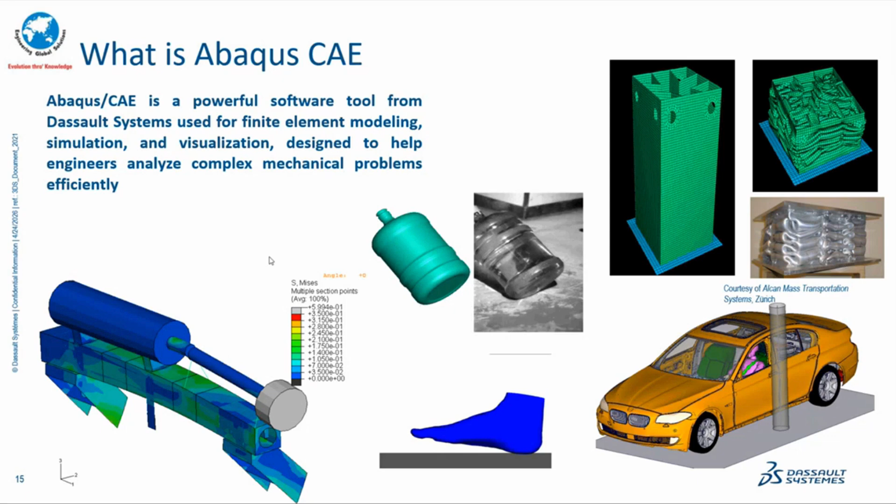Abaqus CAE allows users to create basic geometries directly within the software using sketching tools such as lines, arcs, and rectangles. These sketches can be converted into 2D or 3D parts using operations like extrusion, revolution, and sweep.

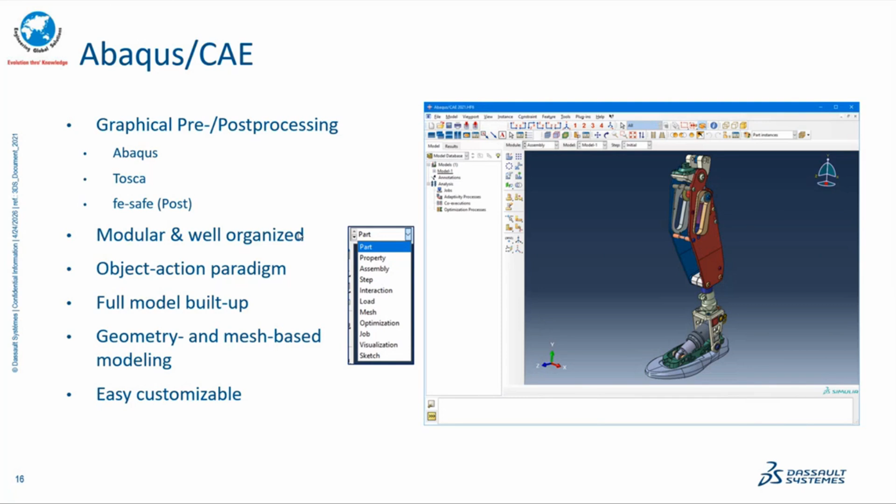Imported geometry can also be used with Abaqus CAE. Other CAD files can be directly imported into Abaqus CAE for analysis. Complex models created in CAD tools can be imported. Abaqus supports common file formats such as STEP, IGS, ACIS, and Parasolid. Output formats from other CAE software like Hypermesh can also be imported into Abaqus, and we can directly proceed to post-processing.

In Abaqus CAE, materials are defined by specifying mechanical, thermal, or other physical properties required for the simulation. Common properties include Young's modulus, Poisson ratio, density, and plastic behavior. Abaqus supports a wide range of material models such as elastic, plastic, hyperelastic, viscoelastic, and damage models. This allows engineers to simulate realistic material behavior under different loading conditions.

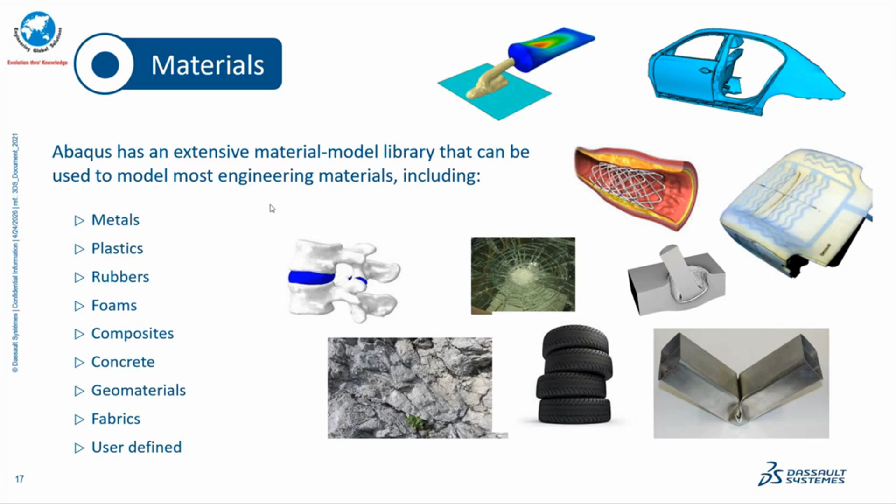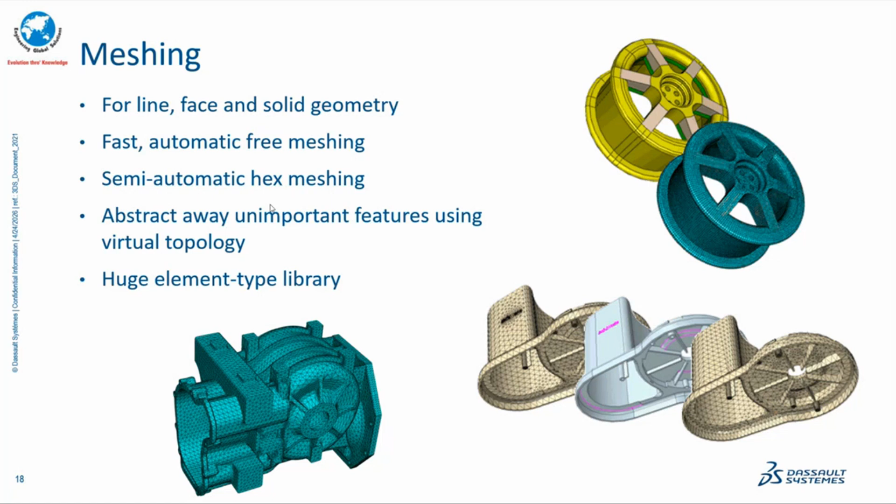Meshing is the process of dividing the geometry into small finite elements connected by nodes. These elements help the software numerically solve complex engineering problems. Abaqus CAE provides different element types and mesh controls such as tetrahedral, hexahedral, and structured or free meshes. The element type is selected depending on geometry complexity and analysis requirements.

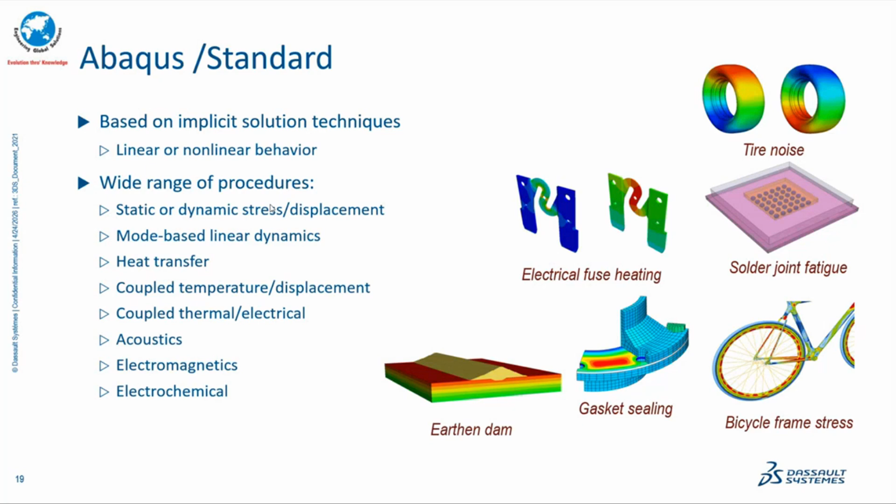We have two different portfolios in Abaqus CAE: Abaqus Standard and Abaqus Explicit. In Abaqus Standard, advanced simulation capabilities include structural analysis, thermal analysis, dynamic analysis, contact simulations, and damage and fracture modeling. Abaqus Explicit is well known for handling complex nonlinear problems such as material nonlinearity, large deformations, contact interactions, and damage and fracture behavior. That's why it's widely used in advanced research and high-end engineering analysis.

Abaqus CAE has wide industry applications. Automotive for crash simulations and durability. Aerospace for structures and fatigue analysis. Energy and pressure vessels for stress and thermal analysis. Manufacturing for forming and machining simulations.

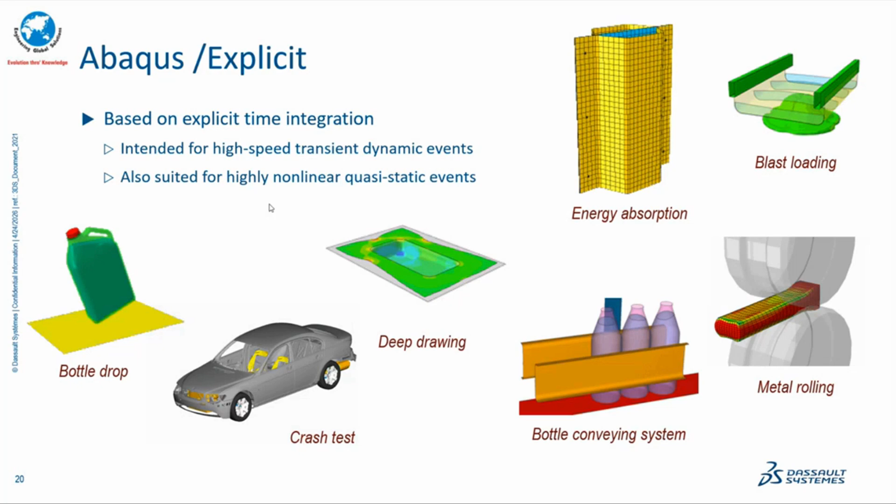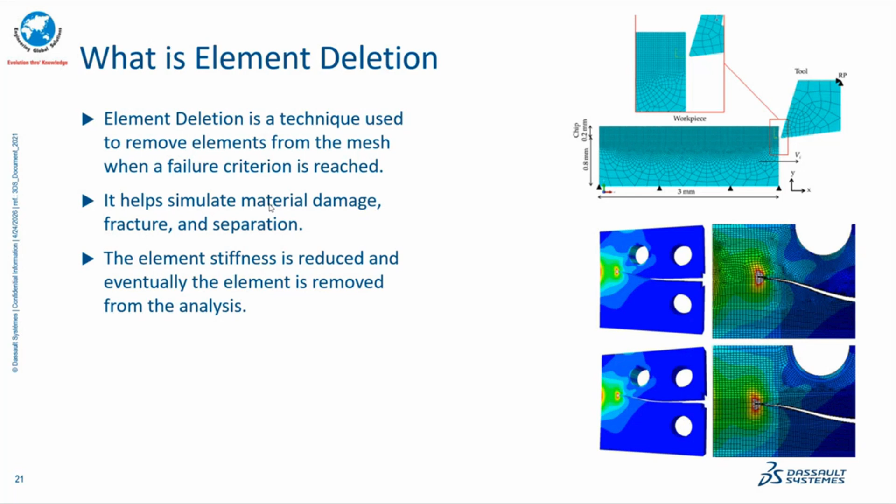Now we will dive into the topic of element deletion. Element deletion means removing the element from the mesh during simulations when a failure criterion is met. The element stiffness is reduced to zero once deleted. It no longer carries the load and is removed from the stiffness matrix contribution. It simulates crack growth or material failure.

This helps simulate crack initiation and crack propagation in structures. As stress increases near the crack tip, the element fails and is removed, allowing the crack to grow naturally in the simulation. This is widely used in fracture mechanics studies.

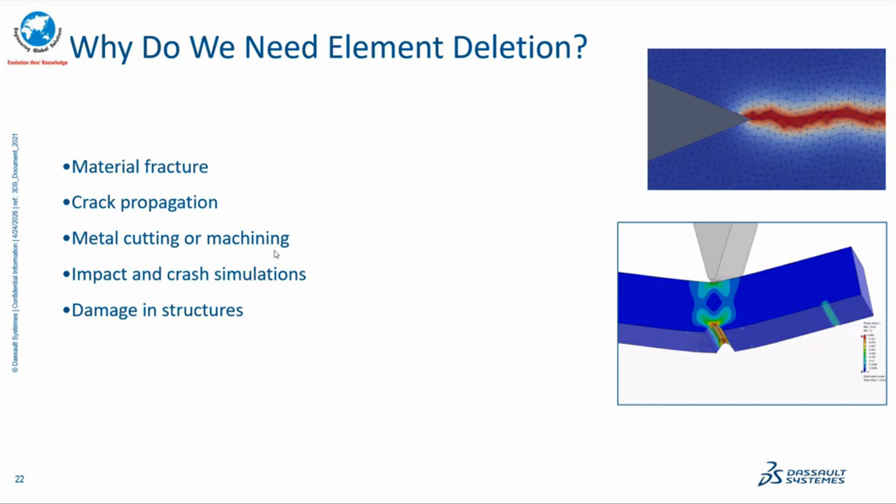The simulations show damage localization near high stress regions. The crack grows as damage evolves in the material. Abaqus damage models help predict fracture path and structural failure.

Ductile damage models are used for metals, large plastic strain, and impact problems. Shear damage model is used for sheet metal forming and cutting simulations. Damage evolution energy is used for displacement-based softening behavior.

The Johnson-Cook damage model is very popular in high strain rate plastic impact crash simulations. The Johnson-Cook model is a constitutive material model. It's widely used to simulate the behavior of metal under high strain rates, large plastic deformations, and high temperatures.

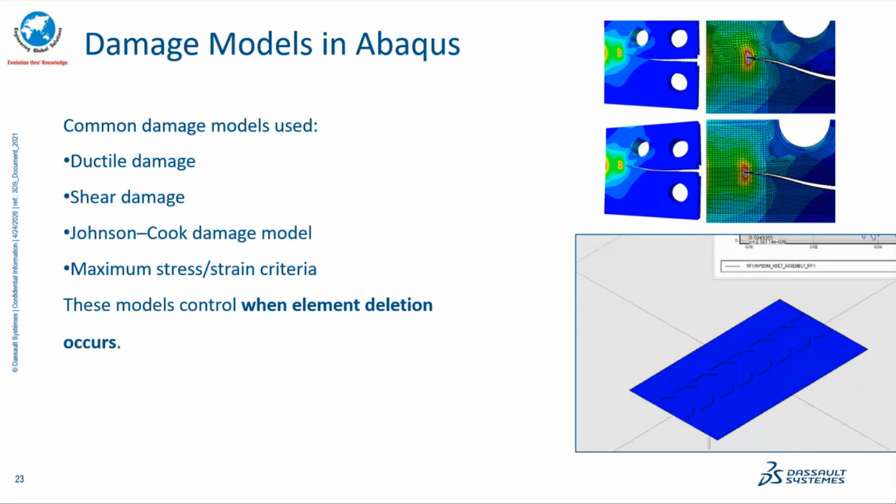In this paper, we will fully explain this model, which is implemented in the Abaqus Explicit solver. Based on our experience in finite element simulations, this model is particularly effective for impact analysis, ballistics, and machining simulations. We use the Johnson-Cook damage model for this demonstration.

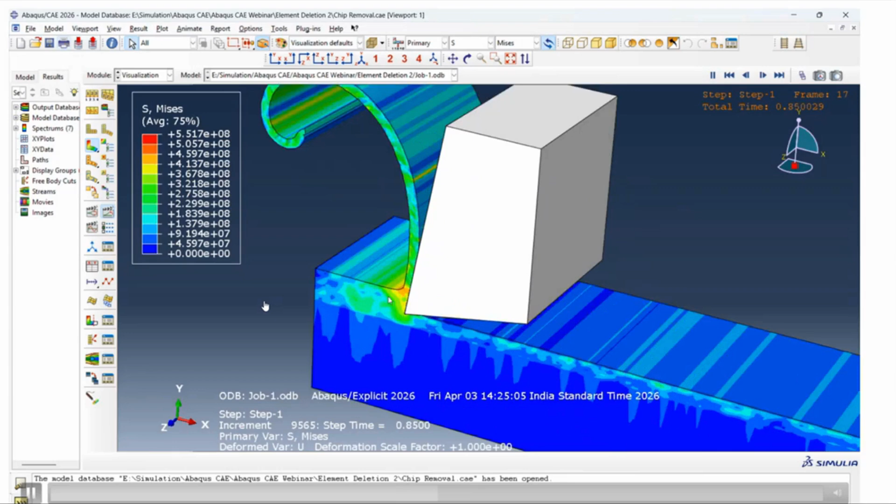I will demonstrate the concept of element deletion in Abaqus CAE using orthogonal cutting, a simplified machining model where the cutting edge is perpendicular to the cutting direction. It's widely used in research to study chip formation, tool wear, and cutting force.

Why this simulation matters: physical experiments are costly and time consuming. Abaqus allows virtual testing of multiple cutting speeds, tools, geometries, and materials. This helps guide the industry in tool design and process optimization.

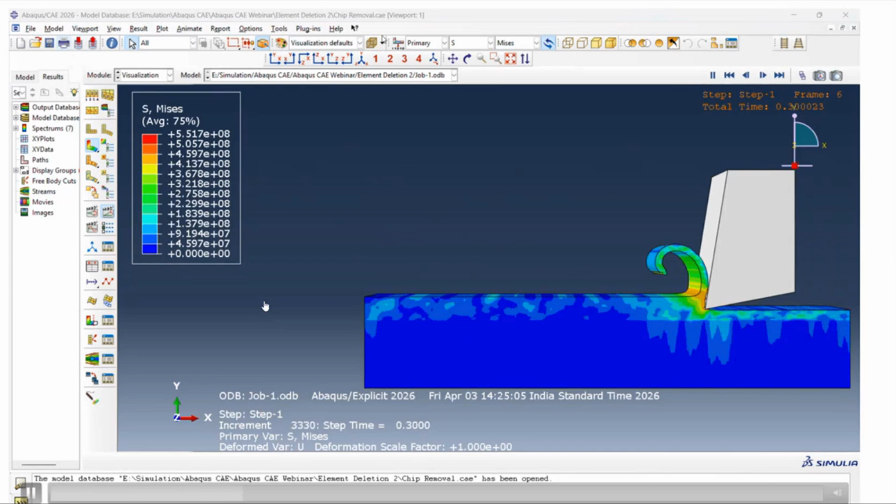In Abaqus itself, we can create the tool and workpiece, building 3D models from 2D to 3D creations with defined dimensions. The tool is modeled as a rigid wedge with a defined rake angle. Cutting edge sharpness is critical to the fine definition in geometry.

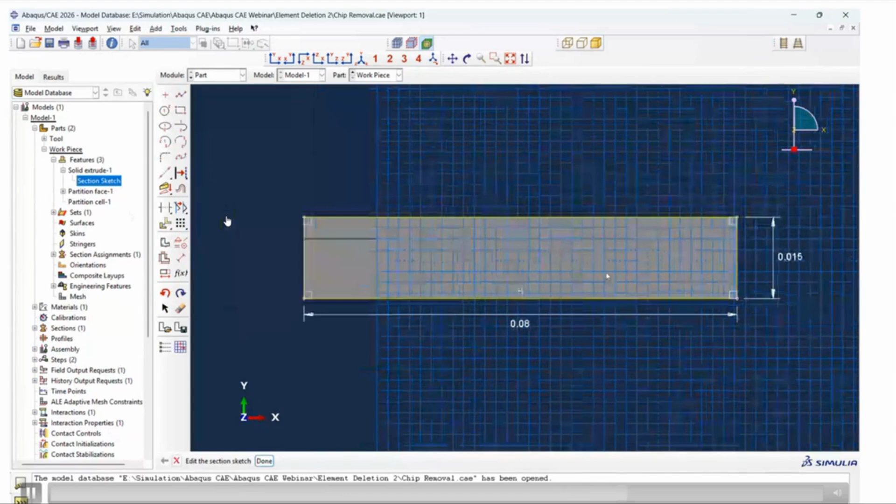We can create the workpiece as a rectangular box, with dimensions chosen to represent a small section of the material, sufficient to avoid boundary effects. This is how we can create the tool and workpiece in the Abaqus interface.

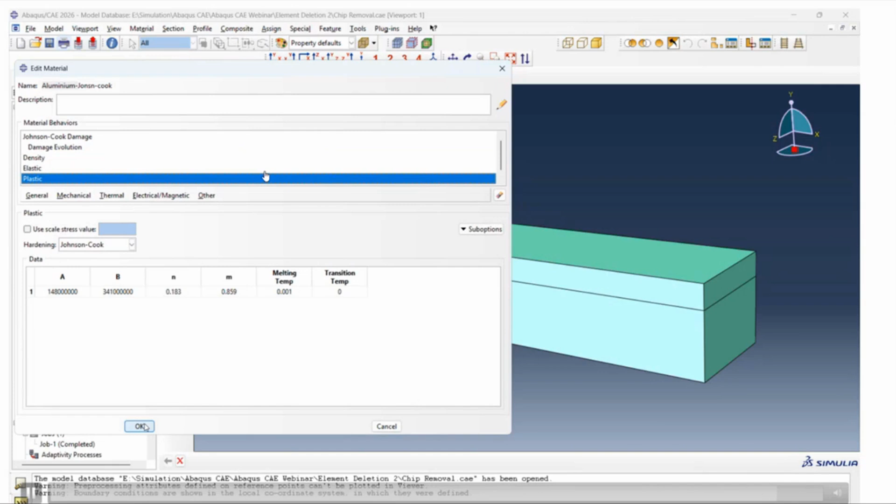Next, we will assign the materials, applying the material property to the workpiece. The workpiece material model uses the Johnson-Cook model as mentioned previously. It's a plasticity model that accounts for strain hardening, strain rate sensitivity, and thermal softening. Input parameters include yield strength, hardening modulus, strain rate constants, and thermal coefficients. We also assign the density to the model.

The tool material will be rigid, but can be elastic with very high stiffness in a thermal effects study.

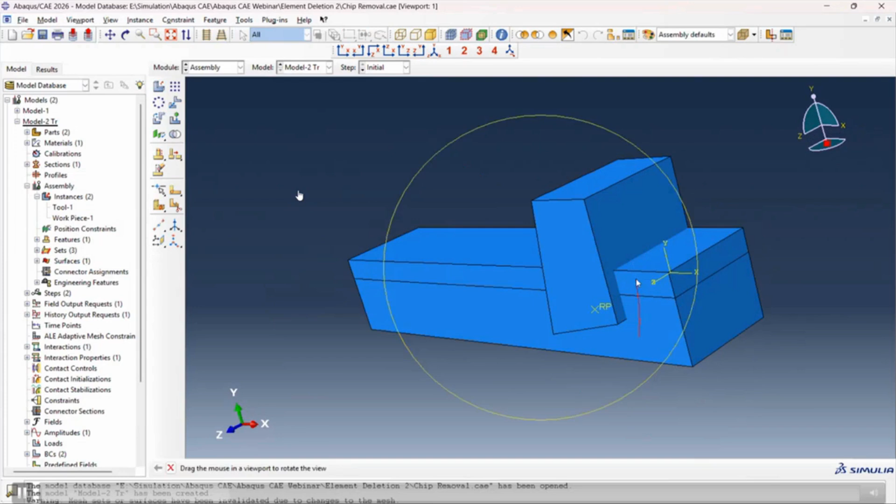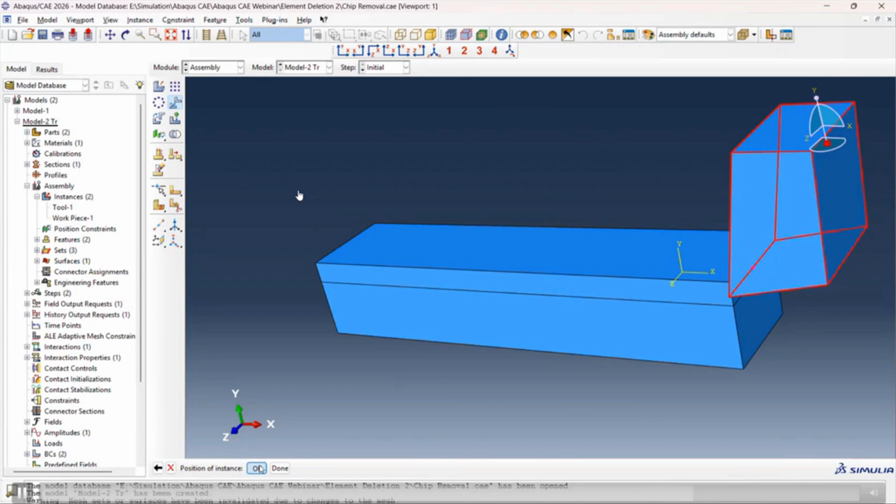Next step, we will assemble the workpiece and the tool in the correct cutting position. The workpiece and tool were imported and created as separate parts, then assembled in Abaqus CAE to replicate the actual machining or forming configuration. This assembly ensures correct positioning and alignment before applying loads and boundary conditions. With the help of the mates in Abaqus CAE, I position the tool and workpiece in the correct format.

We are defining the dynamic explicit step to capture the high speed tool workpiece interactions. In this method, we will define what type of analysis we are going to run. Explicit dynamics is chosen because it handles the complex contact and large deformation effectively.

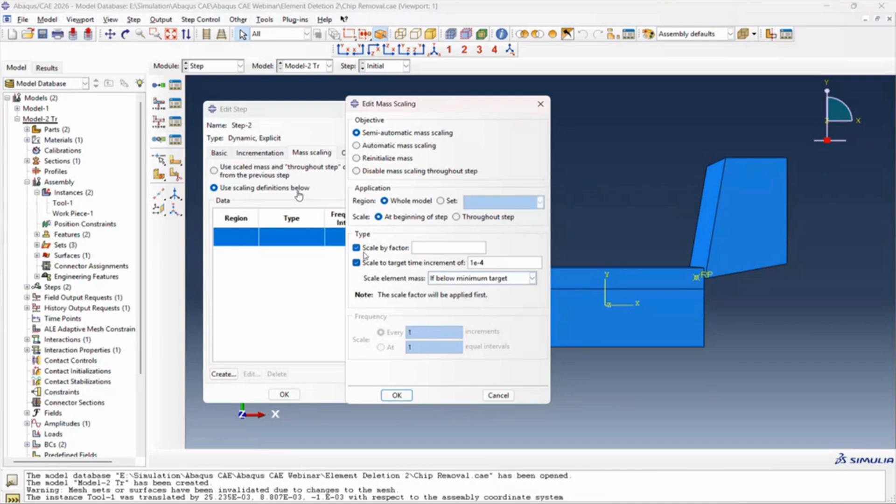Mass scaling is applied to improve the computational efficiency without compromising accuracy. A mass scaling setup is a definition to create the target time increment of 1 × 10⁻⁴. This ensures the stable time increment while reducing the total number of increments.

Next, we will create the output request. The field outputs are configured at 20 intervals through the step. This provides a clear record of stress, strain, displacement, and contact variables over time. The interval settings ensure manageable data size while capturing the evolution of results.

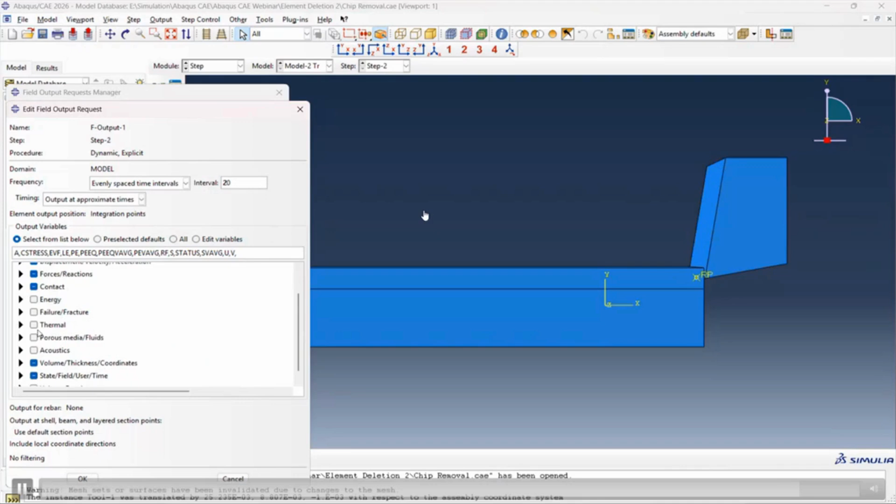The importance of the mesh. Next step will be the mesh module. In cutting simulations, the mesh is more and more important. Creating a best quality mesh directly impacts the accuracy of stress, strain, and temperature predictions in orthogonal cutting.

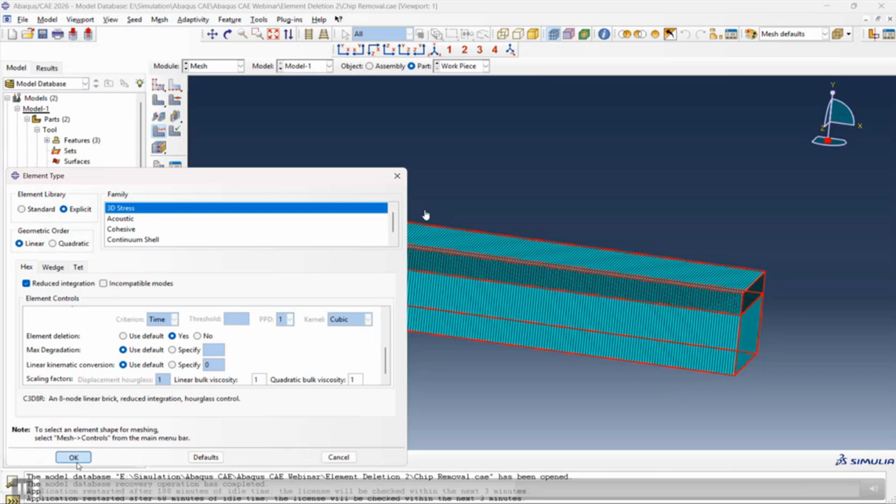Cutting involves a high gradient near the tool workpiece interface. In Abaqus, enabling element deletion allows elements to be removed once they reach the critical damage criteria. This is essential in cutting simulations to realistically represent the chip separation and material removal.

For the tool, focus on the cutting edge and the immediate contact zone of the workpiece. Use partitioning of the workpiece geometry to control the mesh distribution.

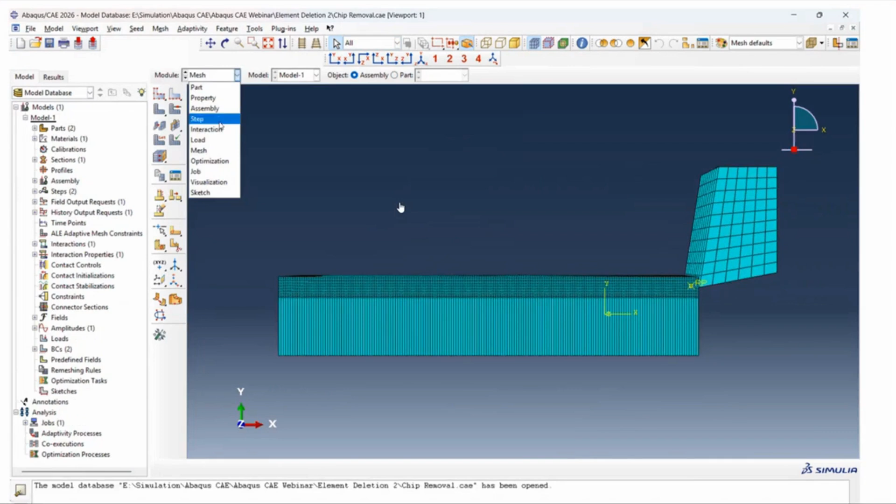Now we are creating the interactions between the workpiece and the tool. The accurate interaction setup ensures realistic cutting forces. Define a contact pair carefully between the tool and workpiece surfaces.

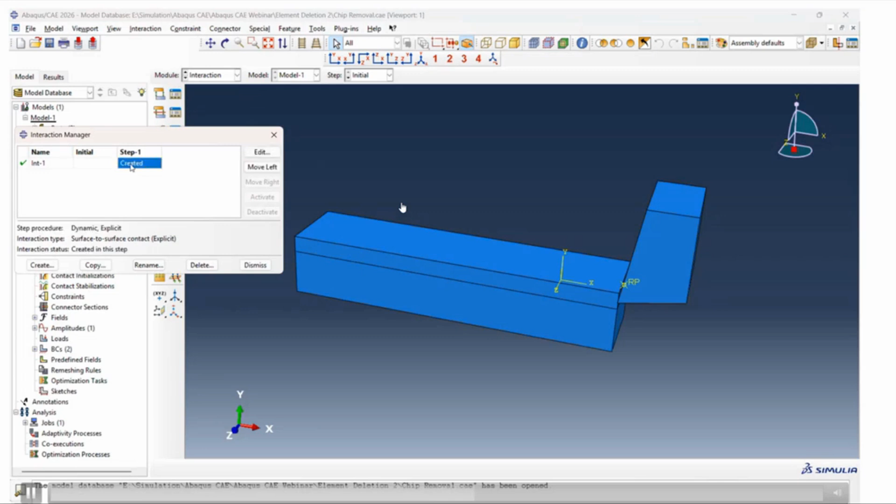Friction coefficient directly influences the chip formation and heat generation. Use experimentally validated values for reliability, thus giving a friction coefficient and normal behavior.

Enable the element deletion in the interactions to simulate the chip separation. This prevents the distorted elements from remaining in the mesh.

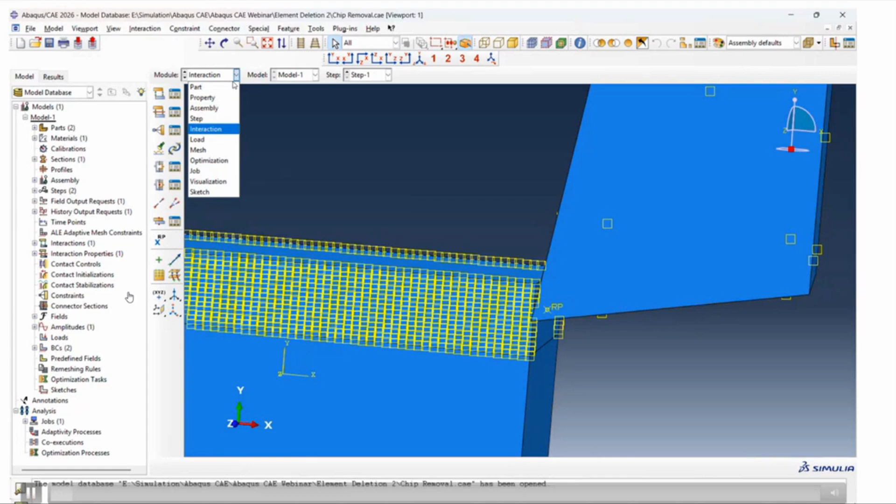The next step will be the boundary conditions. The workpiece constraint: the workpiece is fully fixed in all 6 degrees of freedom, that is, translation plus rotation will be arrested. This ensures no unwanted displacement or vibration during the cutting.

The tool will be in motion in the U1 direction, and we give a boundary condition like a prescribed displacement of 0.08 units representing the cutting stroke in the tool movement direction.

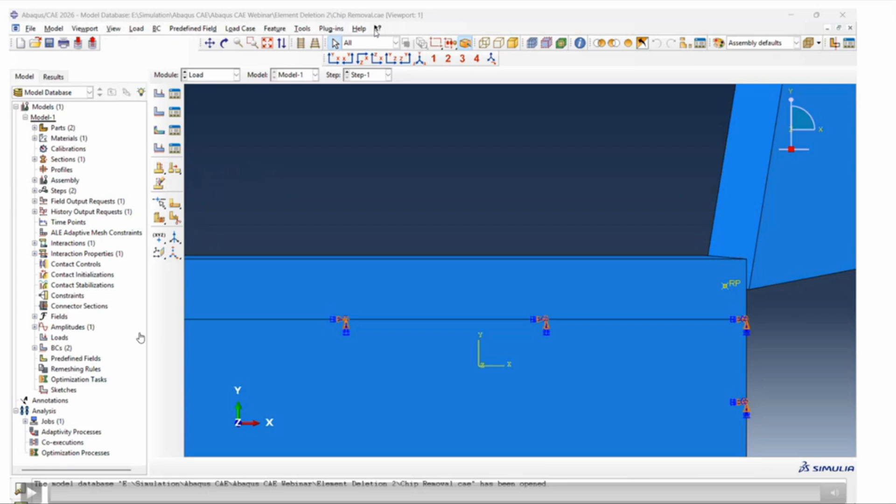Next step will be the job. We will submit the job by creating a job in Abaqus CAE and using the CPU for post-processing.

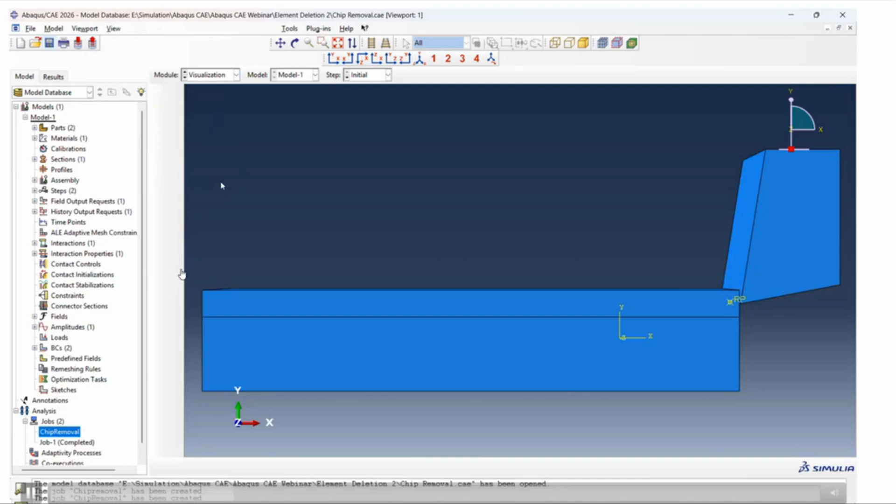The simulation was run using parallelization across 8 CPU cores. This reduces the computation time and improves efficiency for large nonlinear cutting problems. Parallel execution ensures faster convergence while handling the highly refined mesh and deletion-enabled elements.

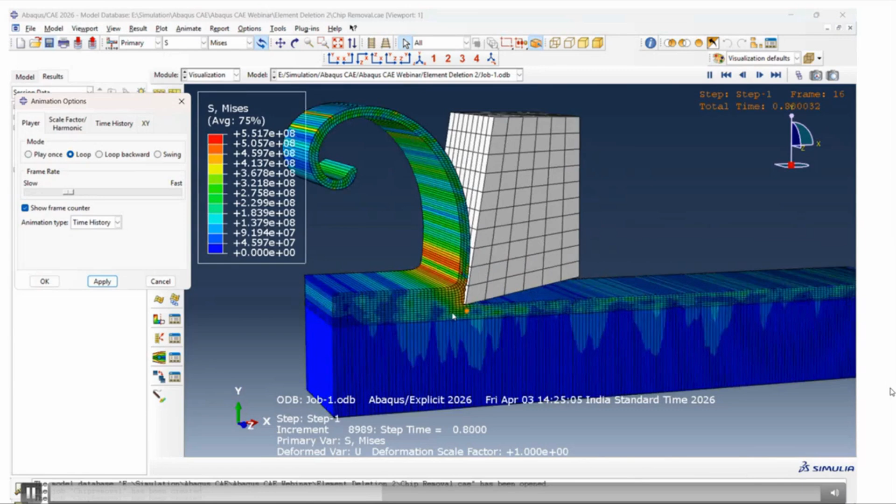The post-processing provides key results like stress, displacement, reaction force, and acceleration. With the help of animations, we can exactly check the behavior of how the tool removes the chips from the workpiece. This is critical for stakeholder presentations to visually demonstrate the cutting behavior.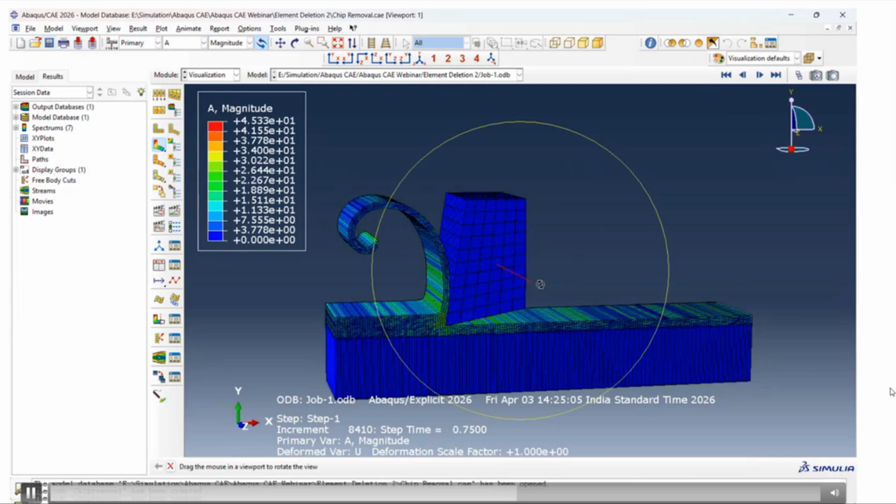Stress contours show high strain zones near the tool tip. Where the tool is hitting the exact face of the workpiece, the stress will increase in particular phases. The reaction force provides insight into the machining load requirements.

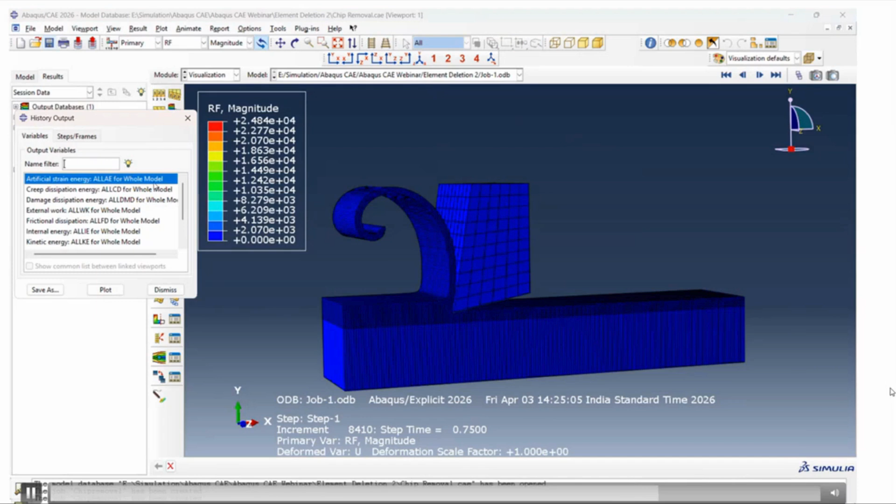Animations plus plots together give a complete picture of the process physics. Also, with the displacement contour plot, we can exactly capture how the tool is moving from one position to another. This can be plotted in XY plots for quantitative analysis and animated for dynamic chip formation and visualization.

Applications and advantages of element deletion: it enables realistic simulations of damage and fracture, predicts material failure and fracture behavior accurately, simulates real-world behavior under extreme loading conditions, and improves product safety and reliability through virtual testing.

It reduces the physical prototyping cost and testing time, enables better understanding of damage progression in materials, enhances crash, impact, and forming simulations accurately, and accelerates decision making in engineering and design processes.

The key takeaways will be: element deletion simulates material failure. It requires damage initiation, damage evolution, and is mostly used in explicit analysis. Mesh plays a critical role.

Element deletion analysis helps engineers understand how material behaves under extreme conditions and enables better product design before physical testing. This is how we can predict the behavior of the workpiece under the tool removal process, using different tools to check and analyze the realistic conditions in a real-time scenario, through virtual testing without spending a lot of investment in prototype manufacturing.